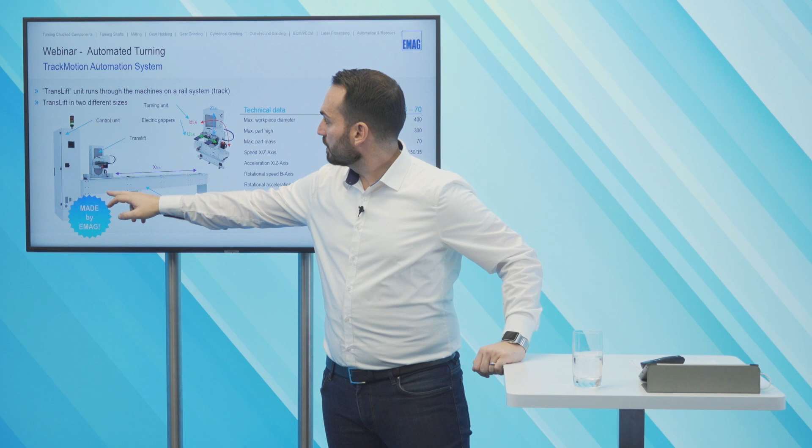Okay, so the TrackMotion automation system. I have here a picture of our TrackMotion. You can see here our translift. And our translift is running on a rail system, so we call it tracks. On the left side, you see the control unit of the TrackMotion system.

Here, a bigger picture of the translift so we know it a little bit better. We have here a Z5 axis - this is the axis to drive up and down. And we have here our turning unit, we call it B5 axis. And also the electric grippers for clamp and unclamp the parts, that's the U5 axis. On the right side, you can see the technical data.

I don't want to explain each point, only the important points. We have two different sizes for our translift: the TM 4-20 and the TM 8-70. The difference in what we can do with these two translifts is the max workpiece diameter from 200 to 400 millimeters, the max part height from 200 to 300 millimeters, and the max part mass from 20 kilogram to 70 kilogram.

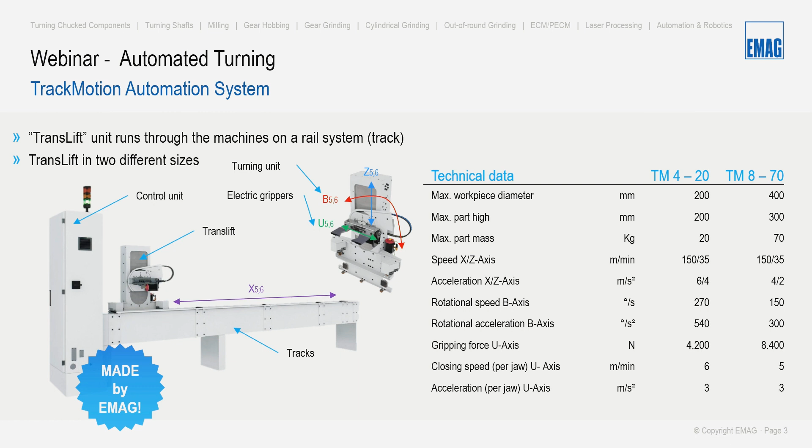Here, a live picture of our translift. So you can see here directly, the translift is equipped with a Z-axis that's lifting up to 650 millimeters. And the gripper can turn over the parts from 0 to 180 degrees. For example, you can make a turnover also to 90 degrees. We have two available gripper sizes with two sets of jaws for the maximum workpiece diameters of our VL series.

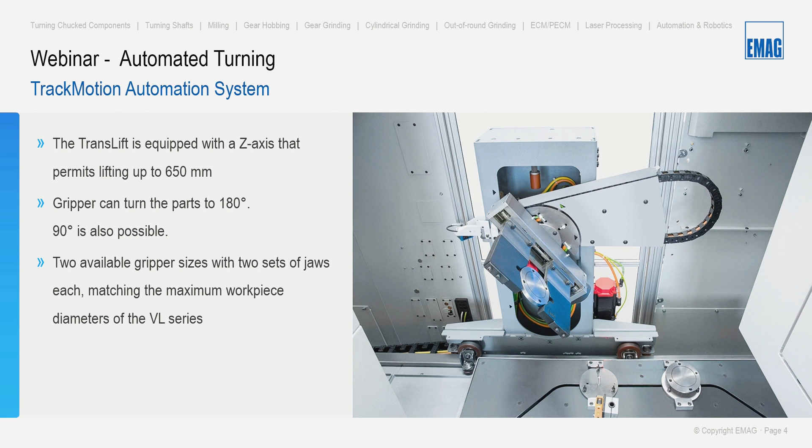If you need any other jaws, for example for your part, we can design it and can deliver it with the TrackMotion system. Here another picture of our TrackMotion system. You can see in one system we have conveyor belts, pick and place units and turnovers in one single system. Here in this example you see a stacker conveyor.

That means we can load a lot of parts. In this example we have around about 200 parts for loading. So that's very good for the footprint.

The TrackMotion is equipped with its own control unit that communicates only via an interface with the machines. So the TrackMotion has its own control unit and the machine has its own control unit, and we connect them together with the interface. The TrackMotion also controls the in-feeding and out-feeding conveyors, or in this example, the stackers.

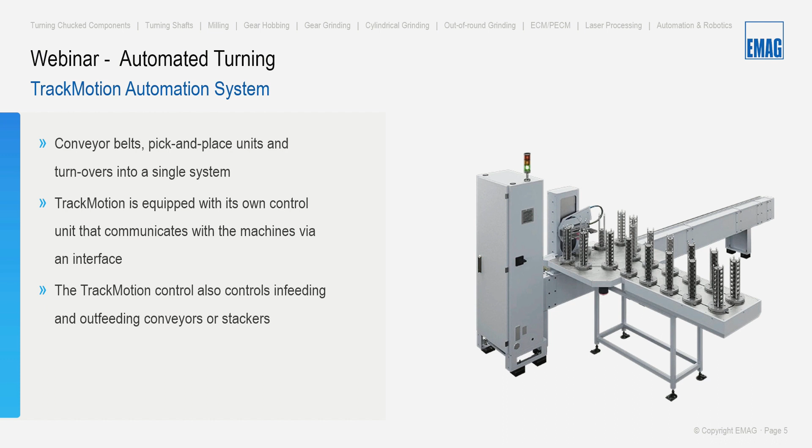So here another example of a line, of a TrackMotion line. We have here 3 VL8 machines. The first one is operation 10, the second one operation 20, and the last one operation 30. As you can see, it's a very lean assembly line, so we have a very small footprint. And also a very big advantage is that we can interlink a lot of machines - here in this case 3 machines together - very easily with our TrackMotion system.

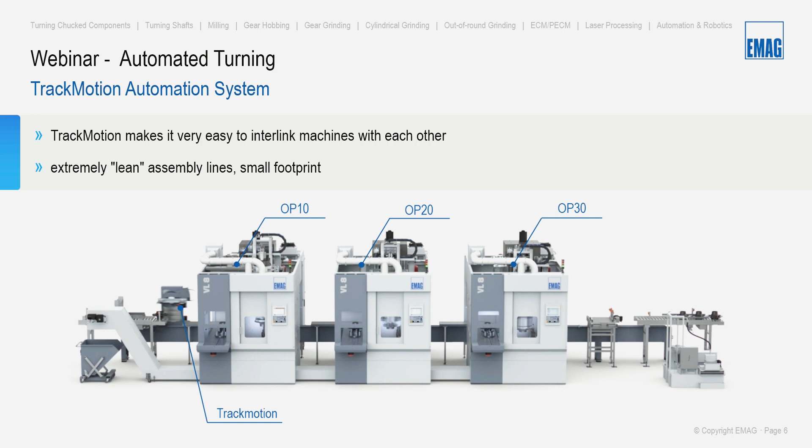Here we have now a question: How is the TrackMotion programmed? Does the automation have its own control system, or does it run via the machine control system?

That is what I have explained before. So yes, the TrackMotion has its own control unit and its own program. That means it's completely disconnected from the machine. You can make the program on the TrackMotion, and we are connected with the machine only via an interface. That means it's running by itself without any other control unit from the machine.

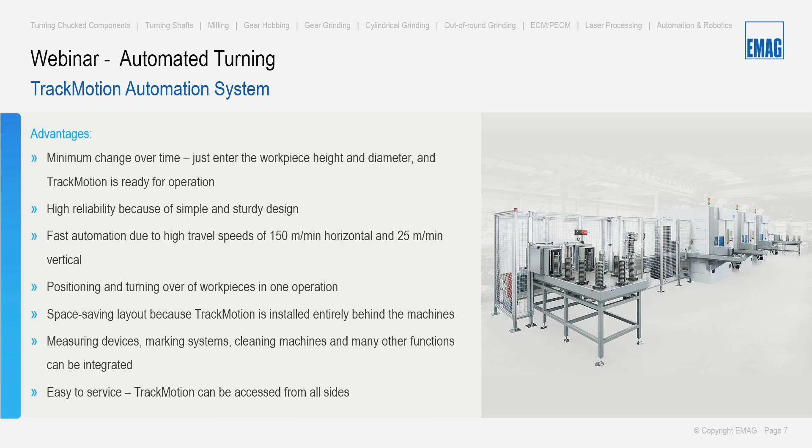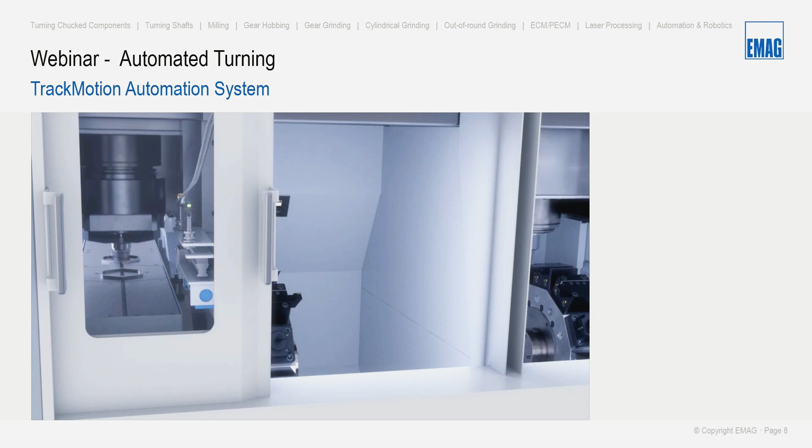Here a video of a VL3 Duo. On the left side is operation 10, and on the right side you can see operation 20. Here we load with our picker system the part in the machine area. Here we are machining the part. That's a turning process.

Operation 10: after that we check this part with the measuring probe of the machine, unload on the pickup system, and load the new raw part. The semi-finished part goes outside.

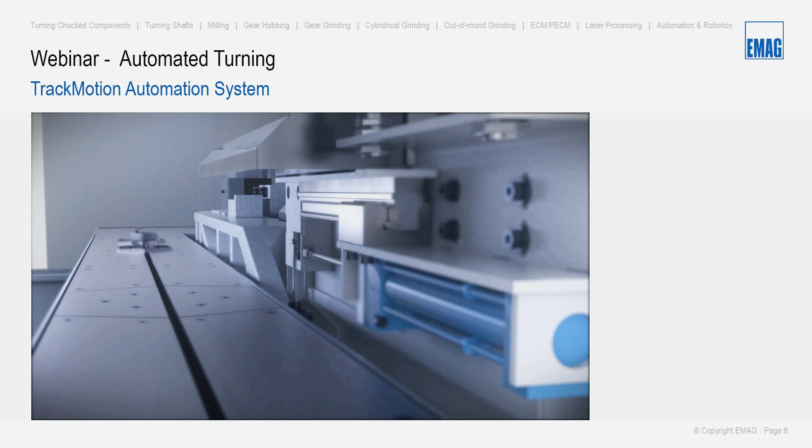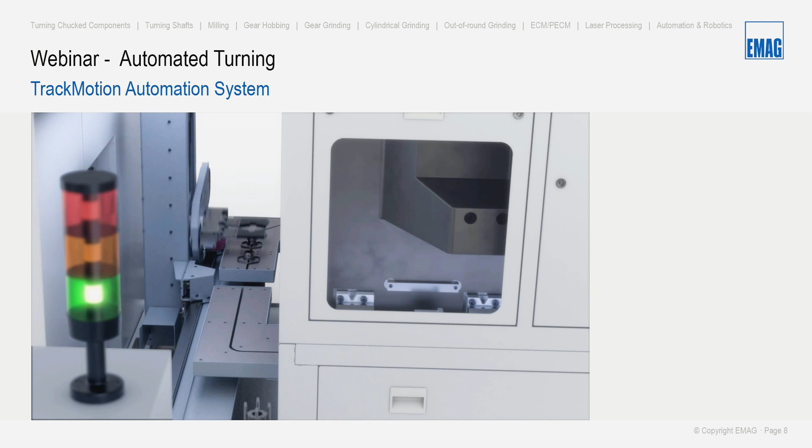The TrackMotion is ready for loading a raw part for operation 10. It takes the semi-finished part, makes the turnover to the next operation, takes the finished part, makes the turnover back, and unloads it onto the stacker system. Then it takes the next raw part directly.

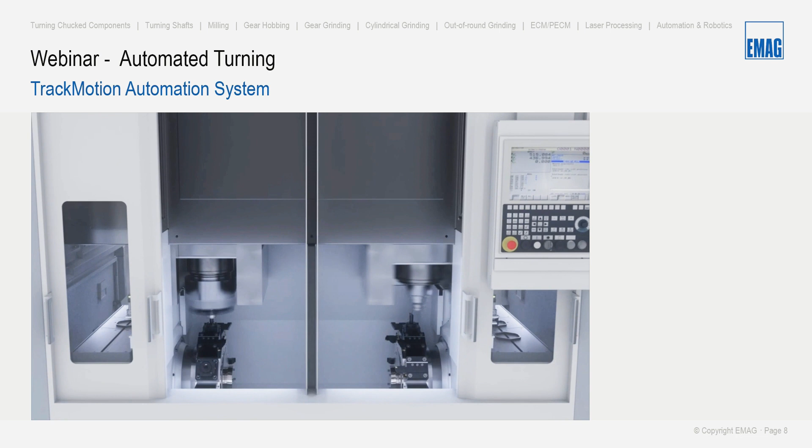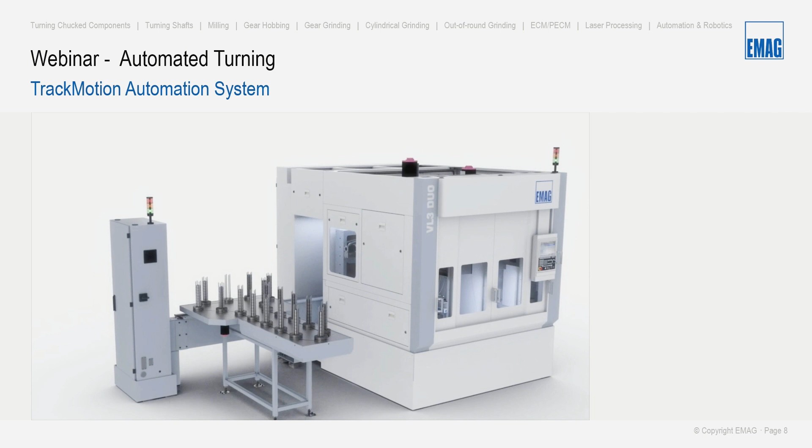So here you can see operation 20, we unload the part, take the new part for machining, and the finished part goes outside to the TrackMotion for loading and unloading. This is a very good example of a small footprint together with our TrackMotion system and our VL3 Duo with 2 operations. The TrackMotion system does the turnover, the loading, and unloading with the stacker. So it's a very good solution from EMAG.

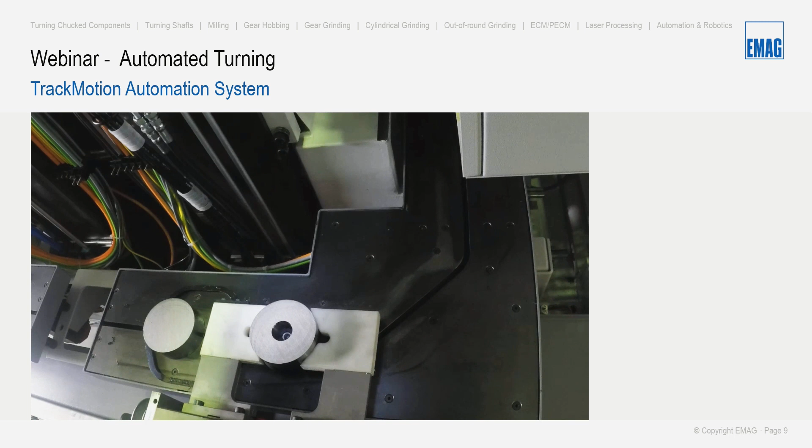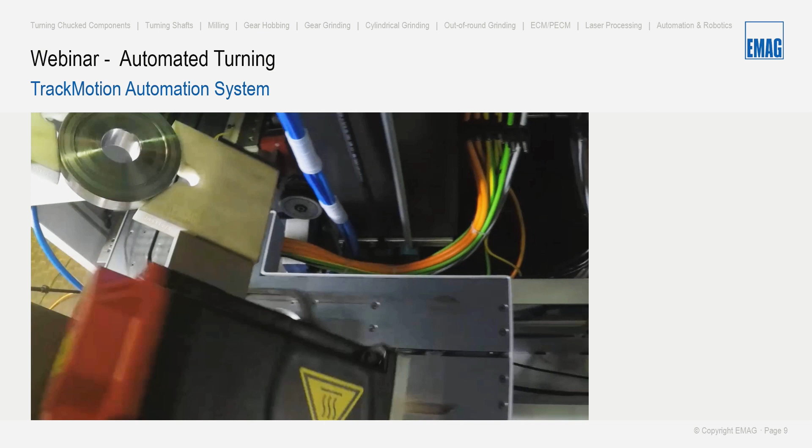Here again a video with our TrackMotion system. That's the same example as before, a VL3 Duo. Now we have a GoPro on our translift. We load the raw part, make the turnover with the semi-finished part for the next operation, and then we take the finished part, make the turnover back, and unload it on our stacker system.

So you can see here on the right side, only finished parts, and on the left side, we have the raw parts. So we have this separated.

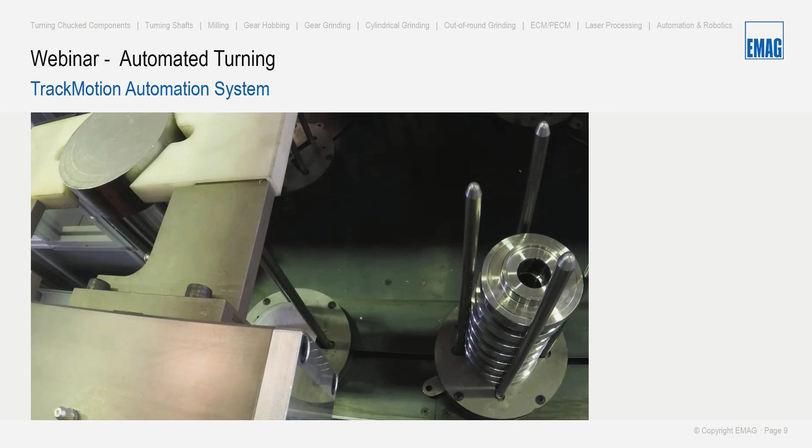Okay, we have a new question. What happens if the TrackMotion fails? Can production continue independently of the automation? Yes, that's a good question.

For example, we have 4 machines, 4 VL8s, and 2 of them are operation 10 and the other 2 are operation 20. If, for example, one operation 10 machine has a failure and we can't run it, we can produce with the other one, and the TrackMotion will load only the second machine. So this machine can be put completely outside of the line. The TrackMotion is not loading it anymore, and the line can run again.

Yes, that's possible. Okay.

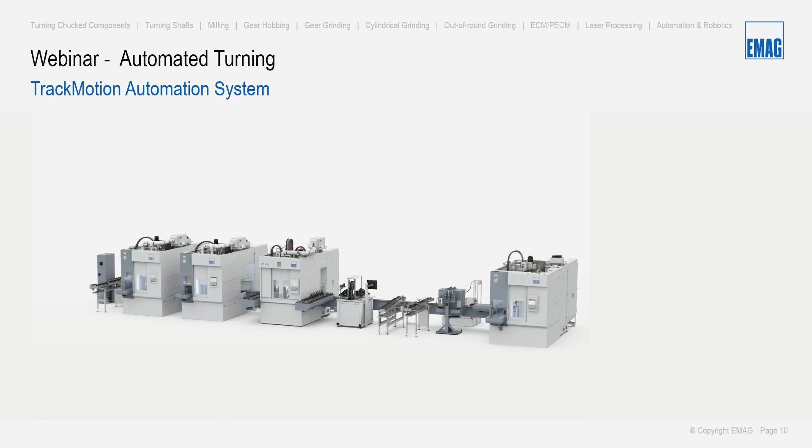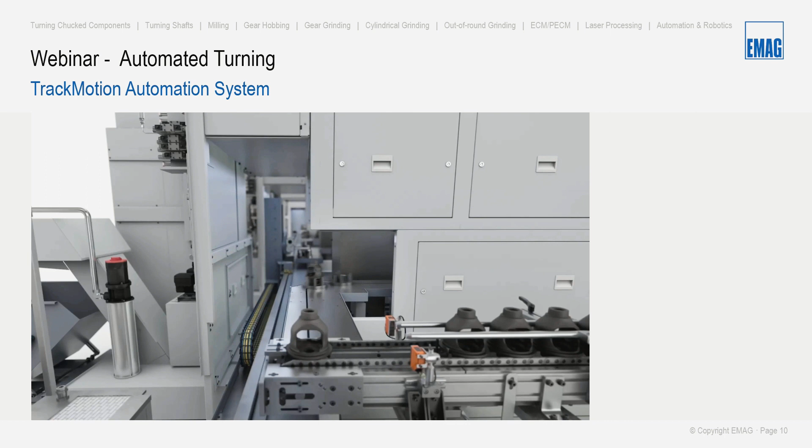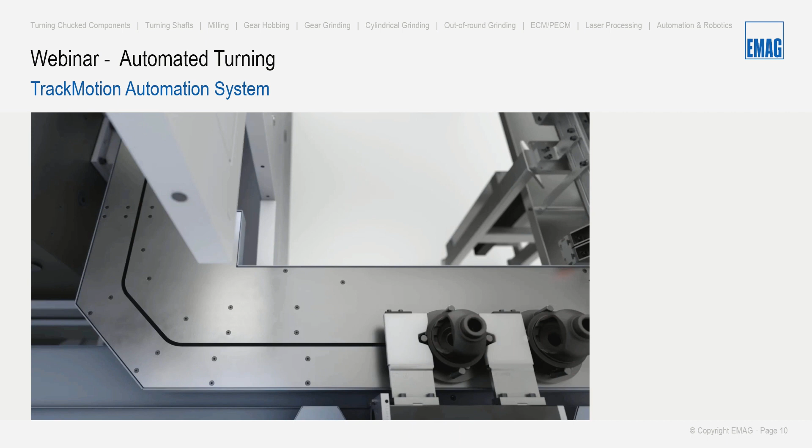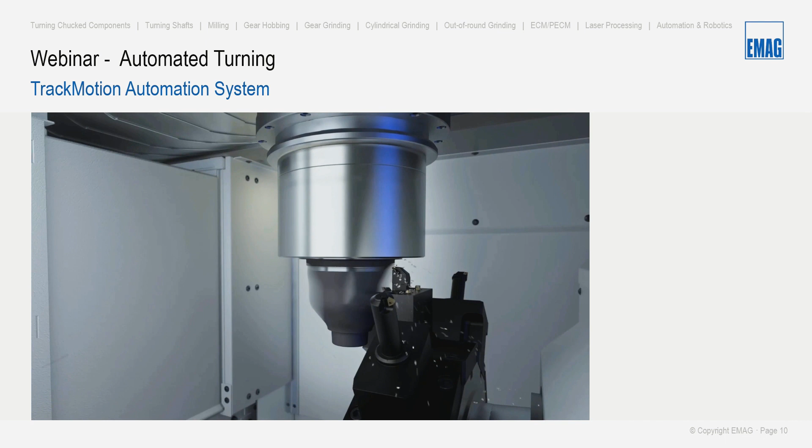Here, a bigger line with our TrackMotion system. You can see here in this example, it's a diff case. So we have here a raw part conveyor. The TrackMotion is loading the raw part for the first operation. We're machining it in the first operation. After that, the TrackMotion is again ready with the raw part, takes the semi-finished part and loads the next operation. So here we make the machining of the other side of the diff case. Then the TrackMotion takes it and unloads on the next machine. In this example, we have a VT4, so it doesn't matter which machine type, the TrackMotion can load and unload.

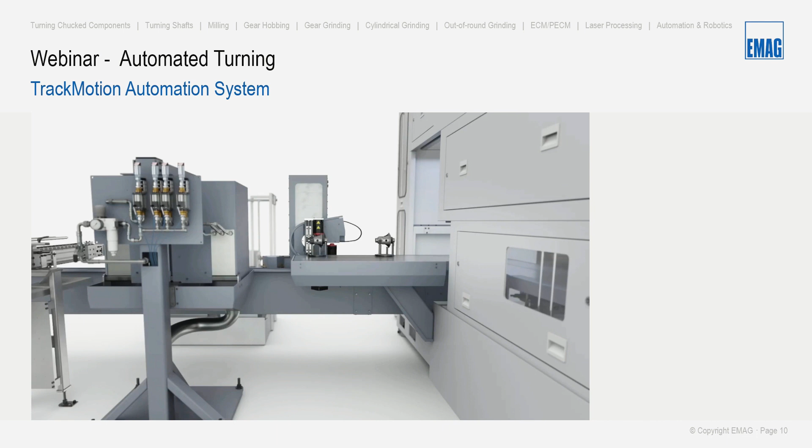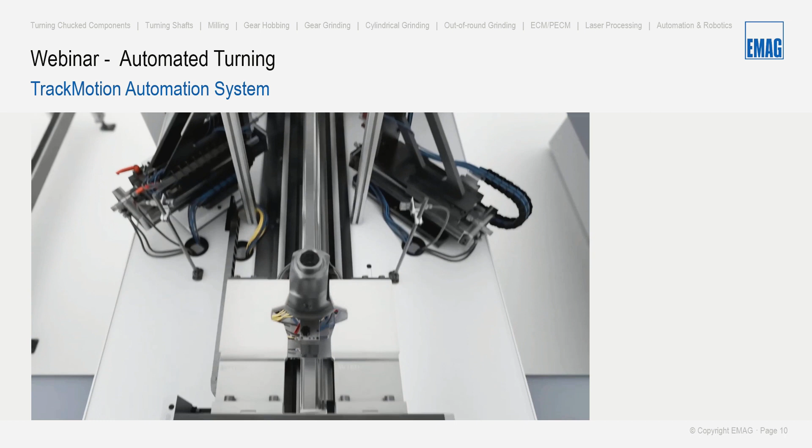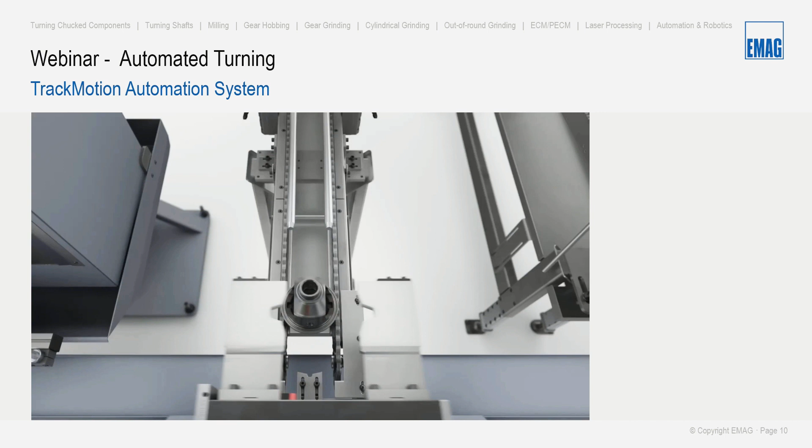So that's a very good and easy solution. You can see we can interlink a lot of machines together. Here we make the turnover to 90 degrees, not to 180, because we need for the diff case the 90 degrees to machine the ball inside. Here you can see the measuring system, so the TrackMotion makes the loading and unloading of the measuring system. And after that, it takes the finished part and unloads it on the finished part conveyor.

Good, so this was the first point, TrackMotion automation system. Now the next point is gantry automation solutions from EMAG.

We have a range of accessories and extensions for the 2 gantry loaders, from pneumatic or electric grippers to a second carriage if it's needed. For example, you need 2 carriages for 2 different parts, then it's also possible, or to save cycle time and we need the second carriage, it's also possible to implement in this solution. A rotary and swivel unit is also possible, and the gantry itself moves via a rack and pinion system, which not only guarantees high positioning and repeat accuracy, but is also very robust.

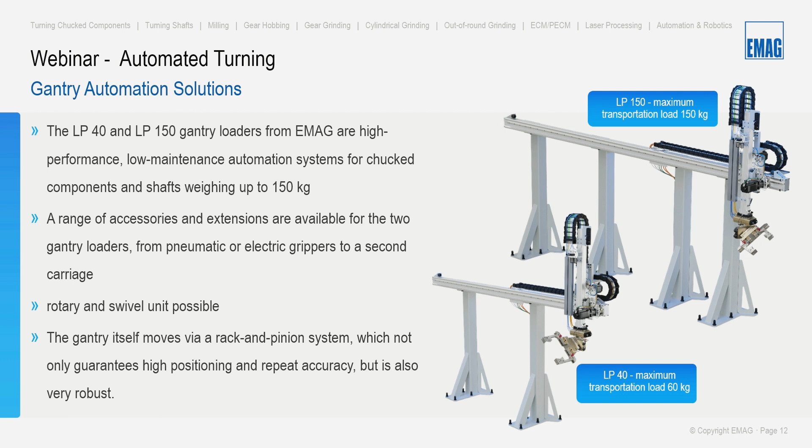Here's an example. You can see here we have 2 VSC 400 duos. On the left side we have 1 VSC 400 duo, and also on the right side a VSC 400 duo. This is a brake disc line. On the left side is operation 10, then operation 20, operation 30, and operation 40. Our gantries are here and here.

So our gantry performs several functions in this example. Our gantry is doing the turnover between the operations, so that means, for example, between OP10 and 20, we need the turnover, and the gantry is doing this job. Also what is possible is that the gantry outsources and insources SPC parts. So it outsources the SPC part, the worker checks the part, and if everything is okay, he can put it back inside and the conveyor will insource the SPC part. It doesn't matter from which operation, it's possible for OP10, OP20, OP30 and OP40.

So, and also what it's doing is placing the parts after machining on the conveyor belt.

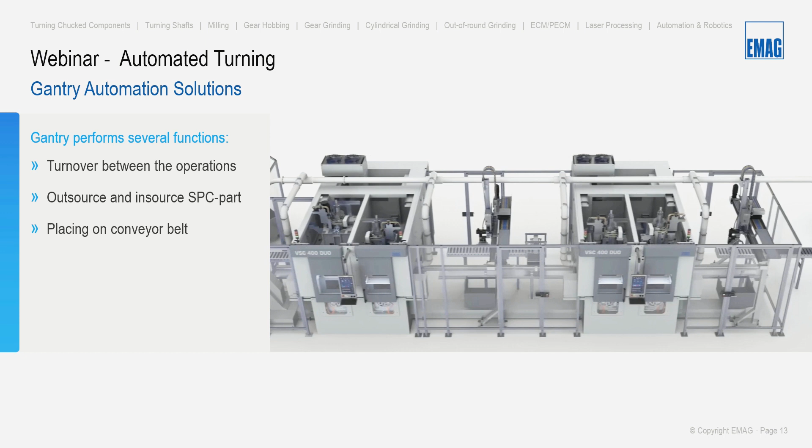We have a question now from the viewer: How are the machines set up? Are all machines stopped during setup, or can a machine be removed from the production process?

Yes, so we can put one machine outside during setup. No, so what we can do is put it outside from the line and run with the other machines. That's also possible, of course.

So here I want to show you, that's the same example, a brake disc line. You can see here our shuttle and also the buffering conveyor. So we designed the gantry inside this line so that we don't lose too much floor space. That means also a good advantage for the footprint of our gantry automation solution.

Also a big advantage of our gantries is that we don't need our own control system for the gantry. That means we put the axis on the machines, or the control for the gantry comes from the machine control, so we're saving a lot of costs.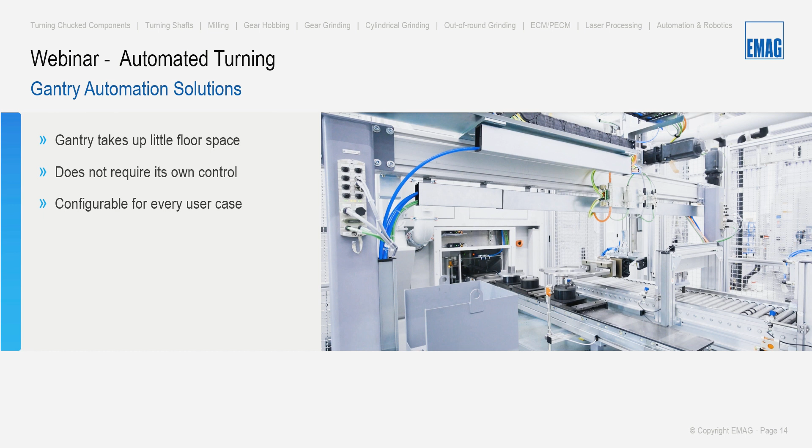Also configurable for every user case. It doesn't matter what you need. So if you need a turnover of the part or not, we can do it or implement everything in this gantry solution from EMAG.

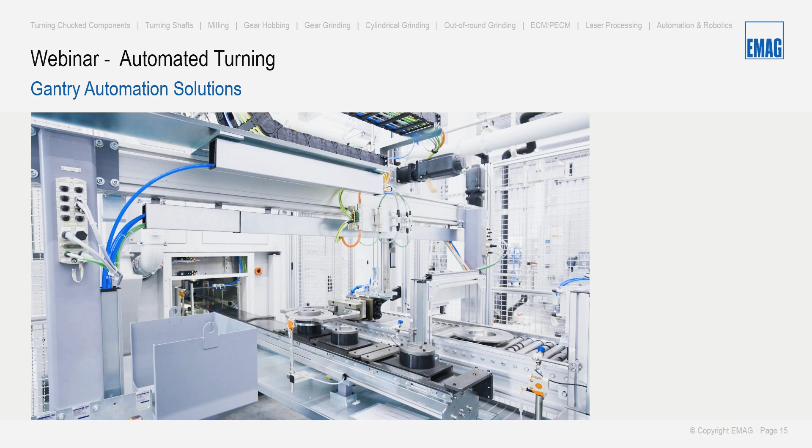Here a video. We're taking the part, clamping with our gantry, makes a turnover to put the chips out the brake disc, and after that we unload on our conveyor belt. Then the gantry is ready to make the next job, to take the semi-finished part and to make the turnover for the next operation.

So that was the first 2 points from my side. The next point, robot automation system, will present you Johannes. Thank you, Johannes. All right, please. Thank you, Daigan, for your presentation. Now I want to introduce our robot automation cells.

They are fit perfectly to our EMAG machines. They can mount on the left-hand side or also on the right-hand side of the machine. It's also very easy to retrofit an existing machine of us. Our cells consist of a base plate with robot and also with an electrical cabinet included. We have an entry door on the back side to enter the cell and do the maintenance, for example.

It's also possible to integrate an additional unit like an SPC drawer or maybe a blow-off station. We mainly work together with a KUKA robot, but also FANUC is possible for us.

We have 3 different loading situations, and here we can select the best situation for our customer requirements. I want to introduce you now in detail: we have the basket stacks, we have a drawer system, and also the infeed with the bin picking solution.

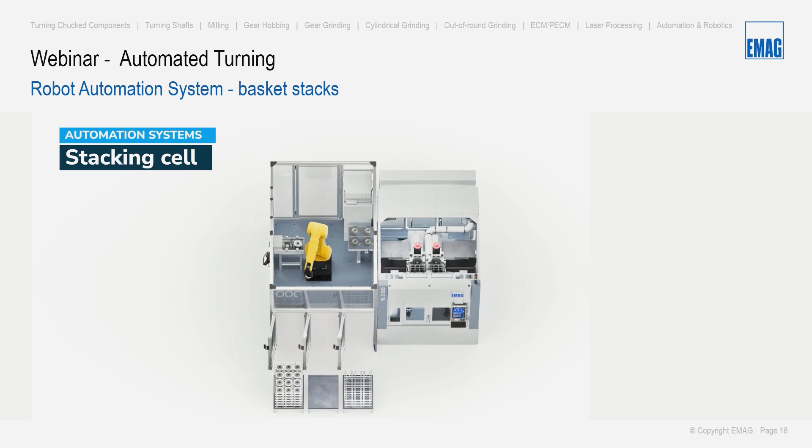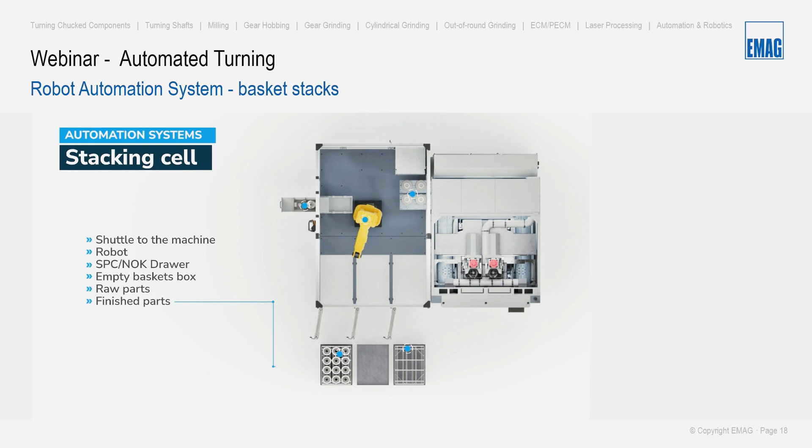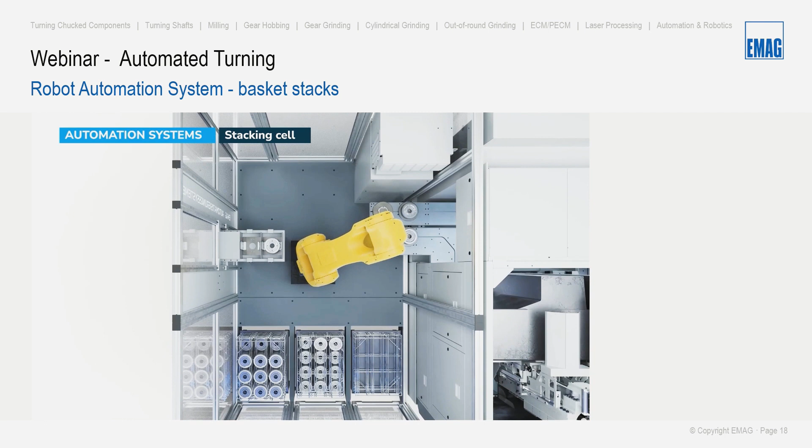Here you can see our basket infeed solution. It's possible to have up to 3 loading bays. We can include the baskets or the trolley of the customer, so we can use the already existing baskets from the customer. Here shown, the size of the baskets are 400 by 600 millimeters, and the stacking height of the baskets can be 1000 millimeters.

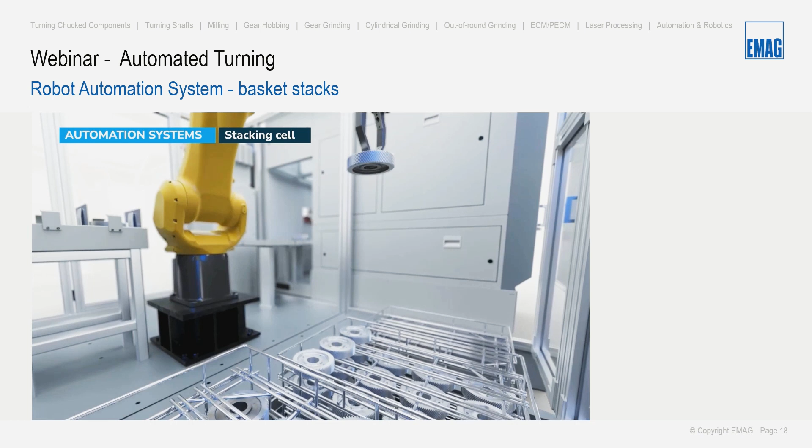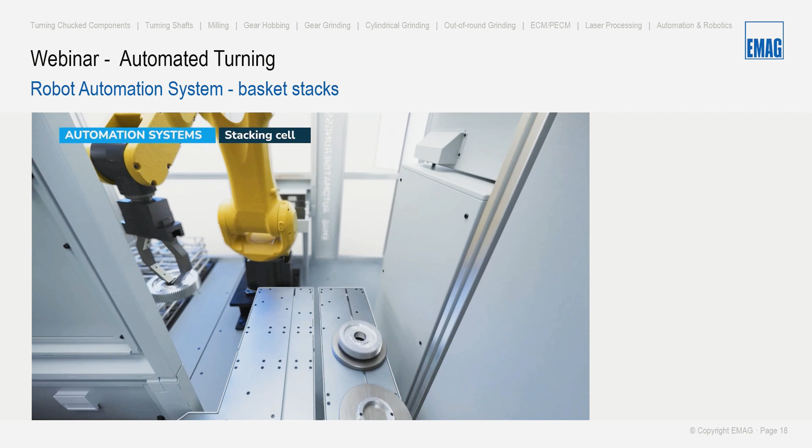The parts are oriented in the baskets, therefore we don't need a camera for the robot. Here you can see the robot will unload the raw part and feed the pallet of the OP10 of this VL3 duo machine. And also the robot will turn over the part to the OP20 pallet, and after that, the finished part will unload to the basket again.

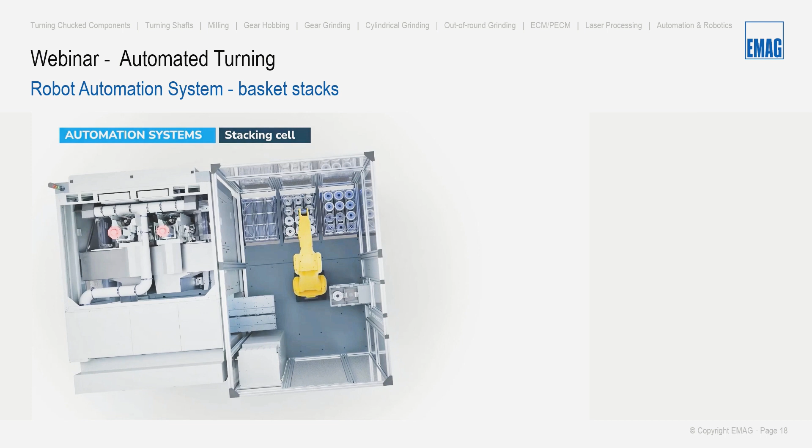The robot is also prepared to unload the empty basket to the different bay.

Johannes, we have a question now. Okay, when is which automation system used?

Okay, I think the viewer wants to know which of our 3 loading systems. I think so, yeah. So in this case, we are talking directly to our customer, and we are choosing together the best solution. For example, this stacking cell solution - if the customer already has some baskets inside his plant, then I think it's a good solution to integrate his baskets and trolleys. But we always have to discuss it directly with the customer and decide together. Okay, thank you. You're welcome.

Okay, now I will continue. Here you can see our drawer system. We have 2 big bays in the front. Each bay can have up to 4 drawers, but that amount depends on the part height.

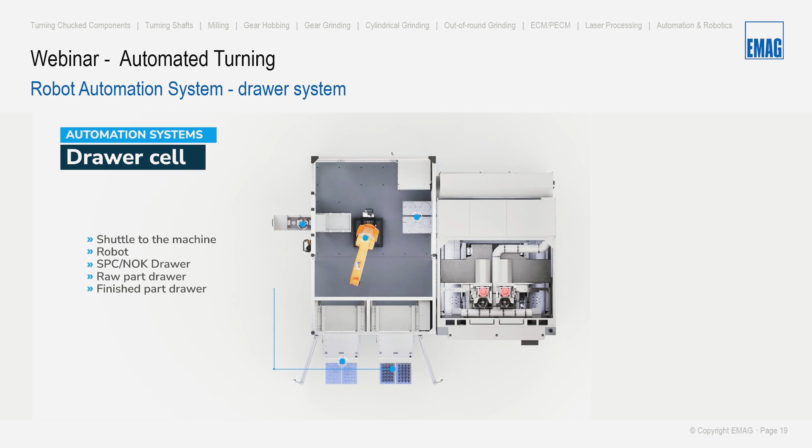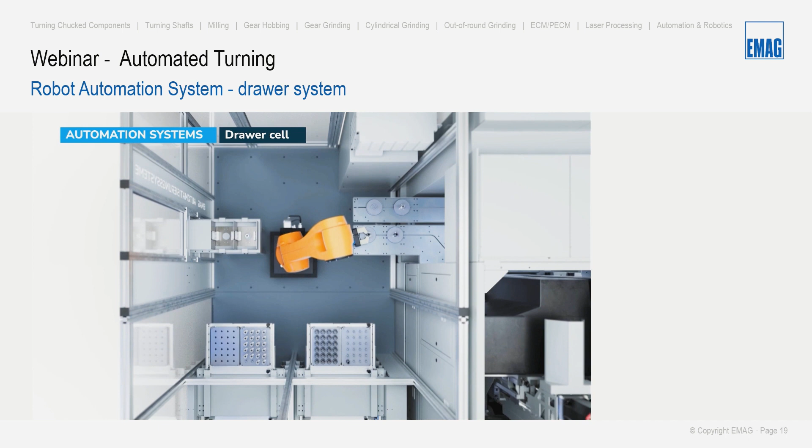Each drawer can have 2 workpiece carriers, and the worker can load these workpiece carriers directly or externally, and load a completely loaded workpiece carrier to the drawer. The robot continues its work inside because they are completely in different areas. So we have a closing door.

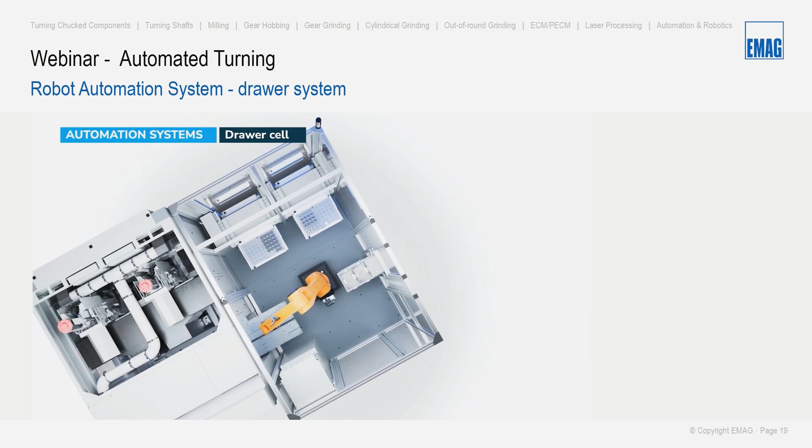As you can see, also the robot will unload the raw part out of the pallet and load it to the machine. The robot turns over the workpiece to the OP20 and unloads the finished part directly to the workpiece carrier on the drawer. In the backside, you can see an SPC drawer - here it's possible to outfeed the SPC parts and also to feed them back into the system.

Now I'm showing you our bin picking solution. Here we have 2 big bays in the front. On the right hand side you can see the bulk material container. The size could be maximum 800 by 1200 millimeters.

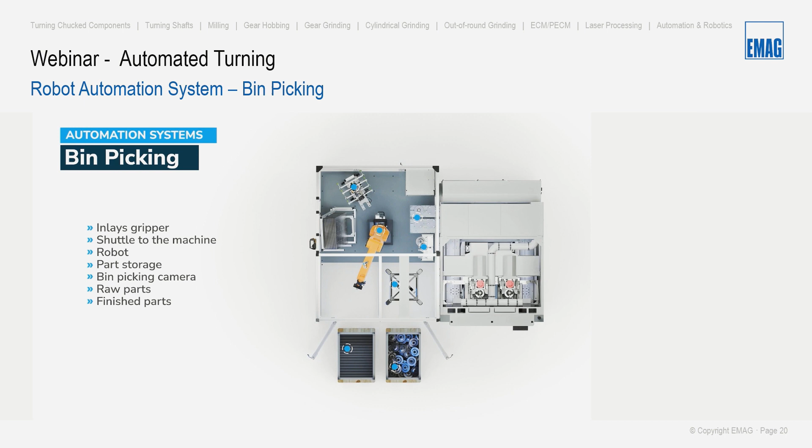Above that container we have a 3D camera. That camera recognizes the parts and also the orientation of the part. Then it's possible for the robot to grip the part out of that container and load the machine.

In this example, we also have a VL3 duo machine. So the robot will load the raw part, turn over the part to the OP20, and then unload the finished part directly to the second box.

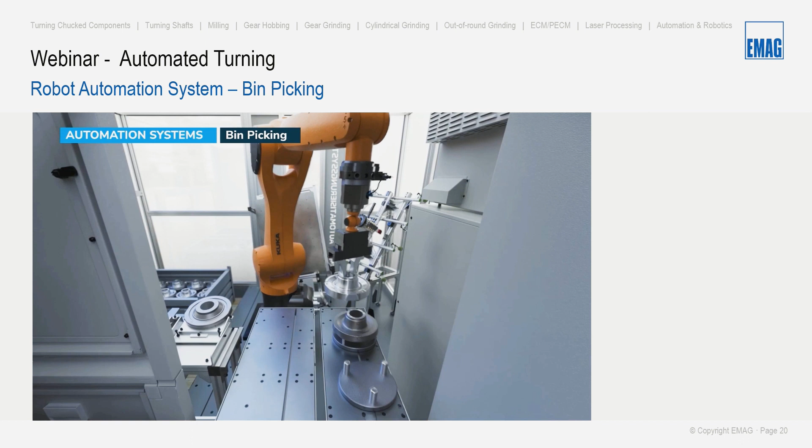Now here you can see the first layer of parts is full. So now the robot can automatically change the gripper and put a layer inside the box. And then the robot can unload the next finished parts again to the box.

Okay Johannes, we have the next question. How flexible is bin picking when changing workpieces? Does the camera system have to be retrained? Okay, that's a very good and interesting question. Thank you.

So if a part is already trained to the system, or maybe two parts, then you can just select the different program inside the control. If the customer brings in a very new part to the system, then of course you have to train this new part to the system. And after that, you can just change the program to the different part. So a new part, one time, you need to retrain, and then after that, you don't need to do that for this part anymore. Yes. Okay, good. Thank you. You're welcome.

Okay, now I'm showing you our stacking cells of the SES series. They are also fit perfectly to our VL and VT series, and also to our hobbing machine of the K series. It's also possible to retrofit existing machines and automate them.

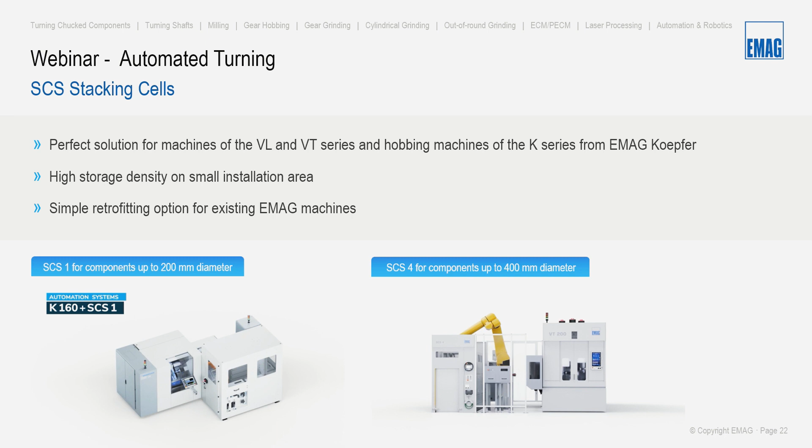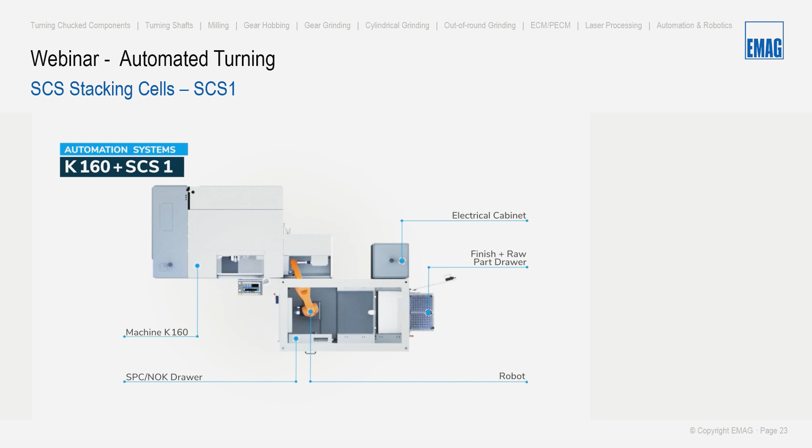Here you can see an SCS1 cell mounted to a K160 hobbing machine. We have a loading door in the front, and again our drawer system included. Also, we have the opportunity to load 4 drawers inside, and each drawer can handle 2 workpiece carriers.

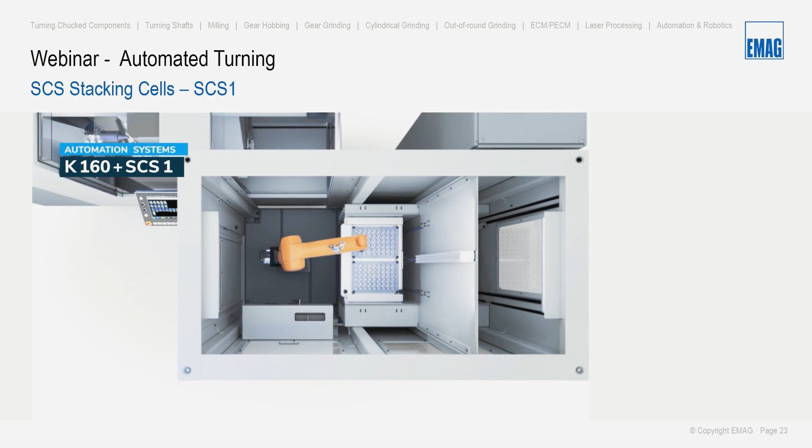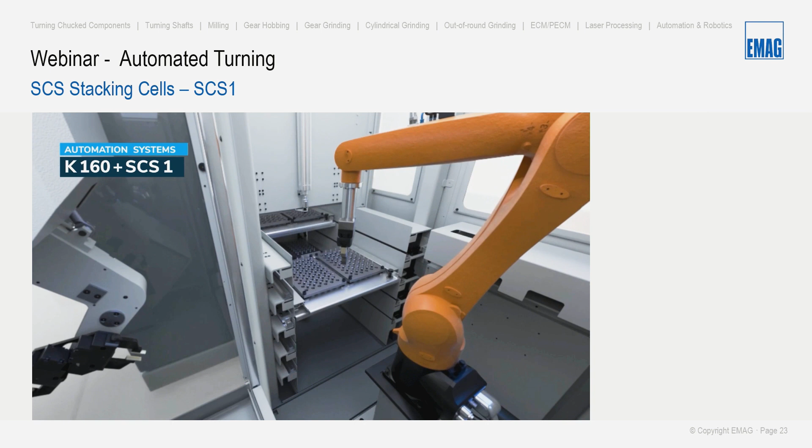In the middle, you can see a door. This door will separate completely the worker and the robot. The robot will unload directly out of an internal loading gantry of the machine and loads the parts to the workpiece carrier. And if a workpiece carrier is full, the robot can automatically change to the next drawer.

You can see the SCS1 is a very small and compact automation solution with robot already included. We have a housing, and also the electrical cabinet is included. In the front and in the back side, we have a door, so you can enter the cell to maintain the robot.

Johannes, we have the next question. Do you have experience with unmanned production? Can the machine produce an entire shift fully automatically? How do you deal with faults during production? Automatic notification. Okay, that's also a very good question.

Yes, we have experience with unmanned production. Here it always depends on the system. So it depends how high is the amount of the actual raw parts available, if it reaches a whole shift. And also it depends on the tooling of the machine. So maybe we have to change the tool after its tool life. But also we have solutions like sister tools inside the machine. So we are delivering solutions for that.

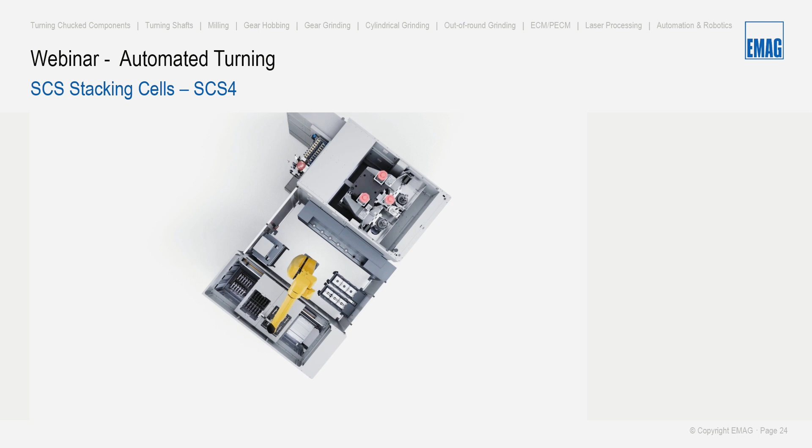Okay, now you can see our SCS4 cell. Here we also have a very big opening door in the front. Here the worker can feed in a stack of pallets or baskets with a forklift, or maybe like here shown in the video, it's also possible to load via AGVs.

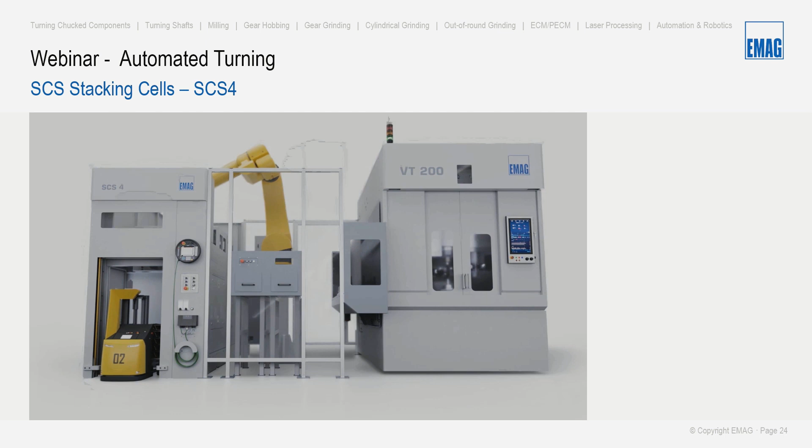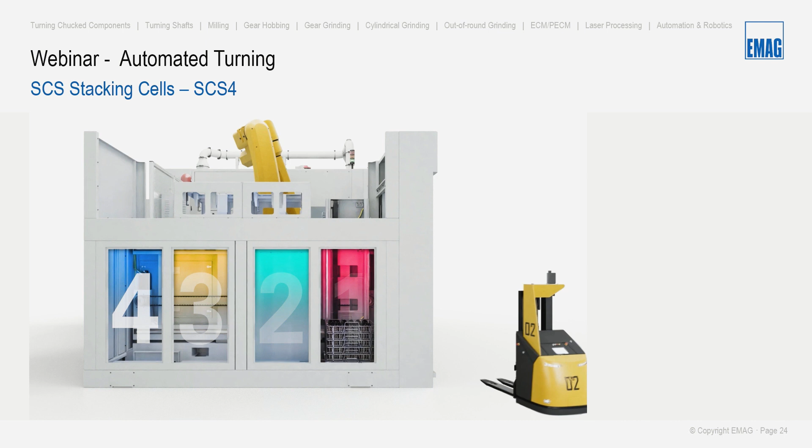The SCS4 has an internal loading gantry, and that gantry will sort the baskets to its different areas. So we have an area for the raw parts, and we have an area for the finished part baskets. And also we have our transfer areas in the top of the machine. Here we can integrate an external automation, like a robot or also a gantry is possible.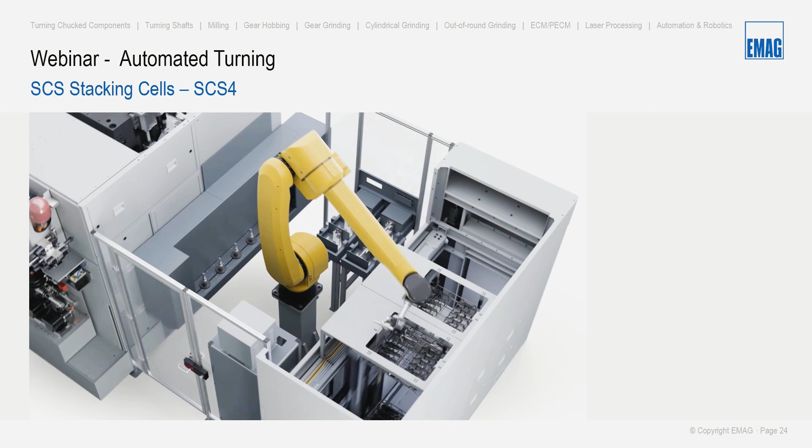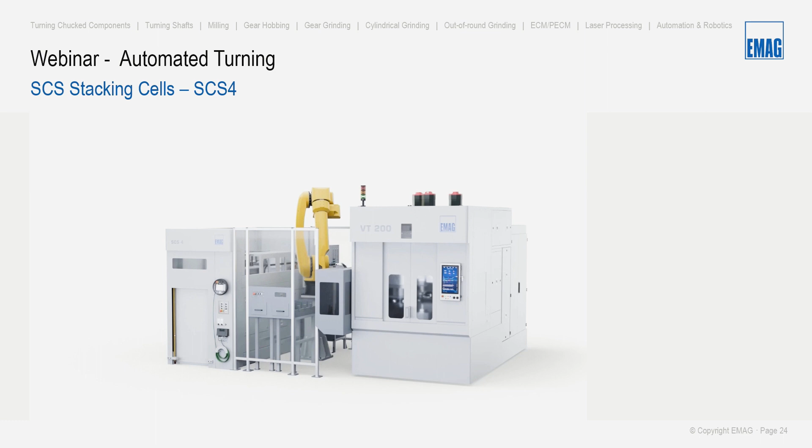The robot will unload the raw part out of the baskets of the machine and directly load a machine, like here shown a VT200. And after that, the robot will unload the finished part back to the finished part basket of the SCS4. And the worker then can take the whole stack of the baskets out of the machine.

Okay, now I will present our customized automation solution. Here we are preparing solutions for special customer requirements. We can interlink a lot of our EMAG machines out of our portfolio, but it's also possible to integrate third-party machines if they are needed for the process of the part. Our task is to choose the best automation solution for the machine to handle the parts.

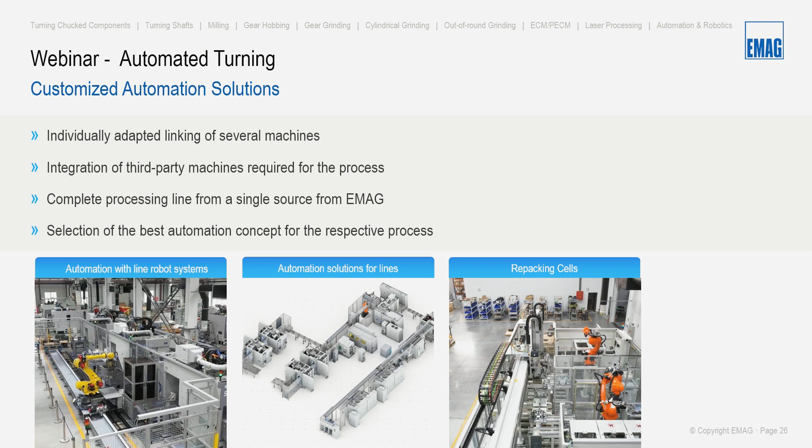And here I brought to you 3 proposals, which we already designed together with our customers. These 3 solutions I want to present now. The first one is a line of 3 VL8 machines in a line. 2 machines are producing the OP10 and 1 machine is producing the OP20.

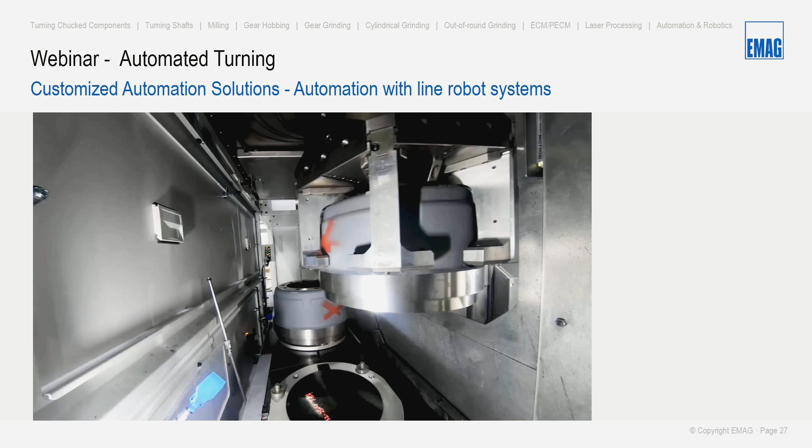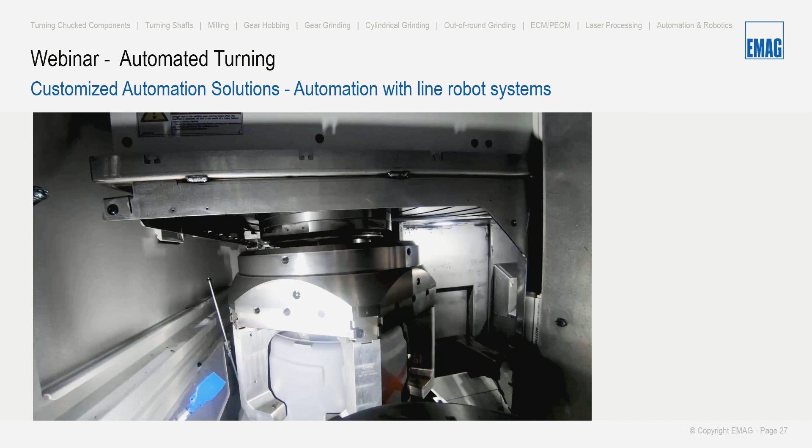A robot will load the part to the L shuttle of the machine. The machine will unload the semi-finished part to the conveyor and grip the new raw part. After that, the machine will load its production area and produce the part. The finished part of the OP10 will go outside to the robot, which will turn over the part for the OP20. Here you can see the OP20 machine is very far away from the OP10.

Therefore, we have to mount the robot on a 7th axis to reach the OP20 machine. Again, the robot will load to the L shuttle of the machine. The machine will unload the finished part to the L shuttle and load the OP10 part to the working area.

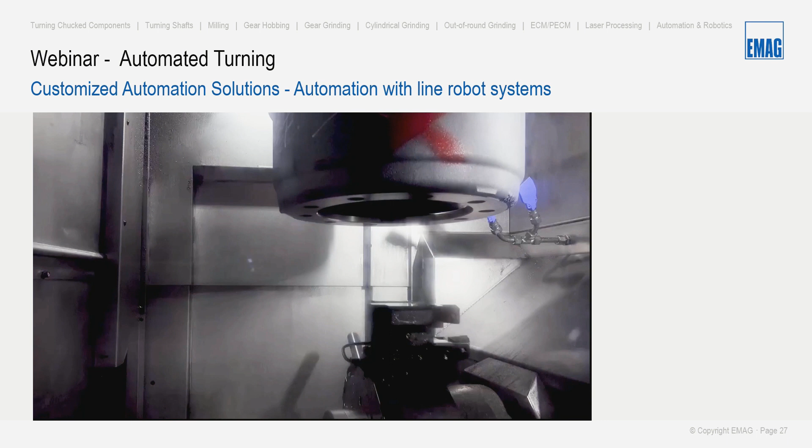Now you again can see a short sequence of our process for the part. After machining the part, it goes outside to the robot area. Here the robot again turns over the part, loads it to a blow-off station and also to a marking unit. After that process, the robot will load the finished part to a finished part pallet.

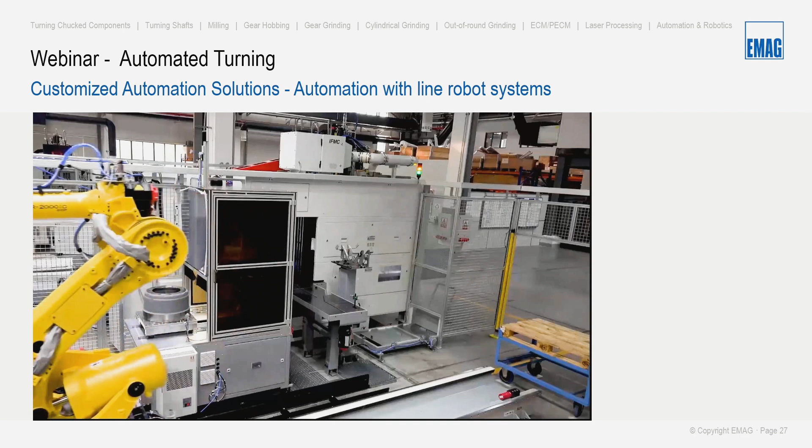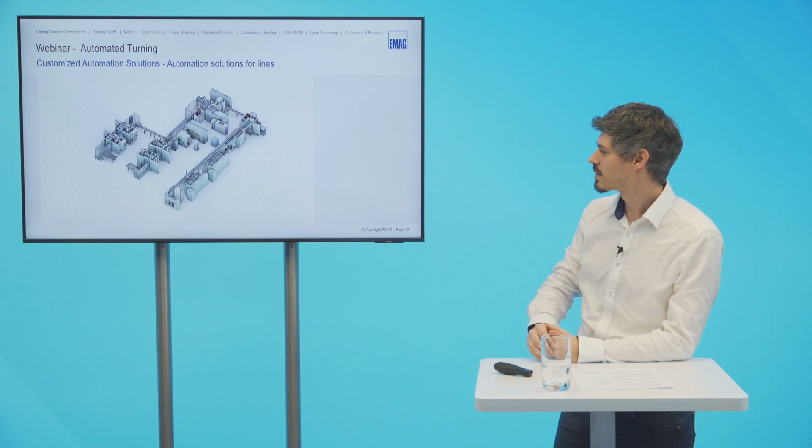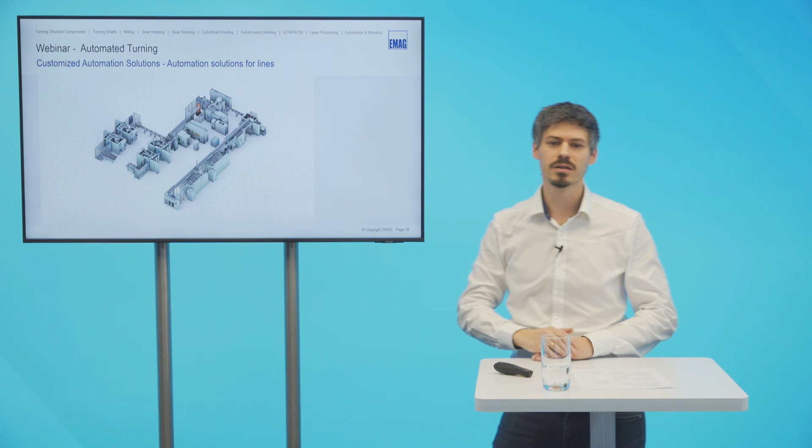Also on the backside we have a TurnMotion, which will turn over the part for the production. Here we have a connection conveyor. From this conveyor, the gantry loader will grip the part, load a blower station and also a measuring unit. Then the part goes inside a robot cell.

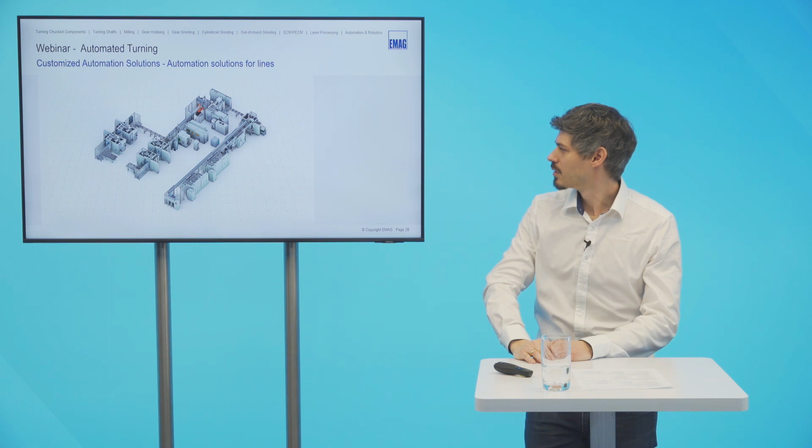This robot will load a hobbing machine. After that process, we have a pallet conveyor belt in the back. Here we have a very long gantry loader, which will load several different turning machines of ours. At the end of the line it will unload the completely finished part to the basket of an SCS4 cell. The worker can then outfeed all finished parts in the basket in a stack.

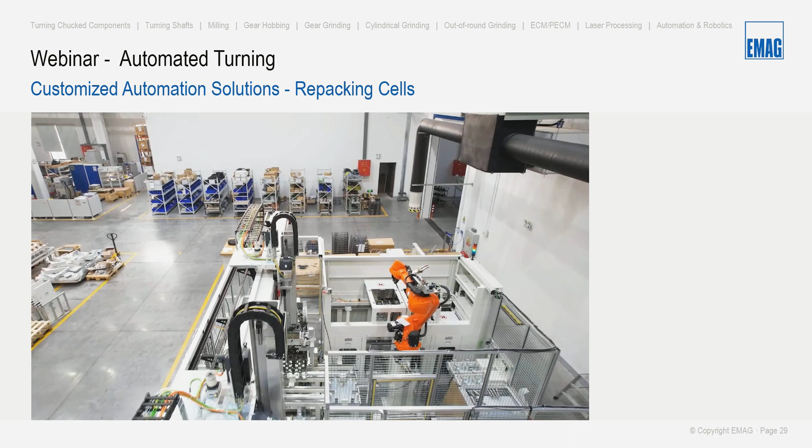Here you can see a pure repacking cell. We have 2 SCS4 machines. Each machine has a robot integrated. The robot will unload the baskets of the customer and load the parts to a hardening basket.

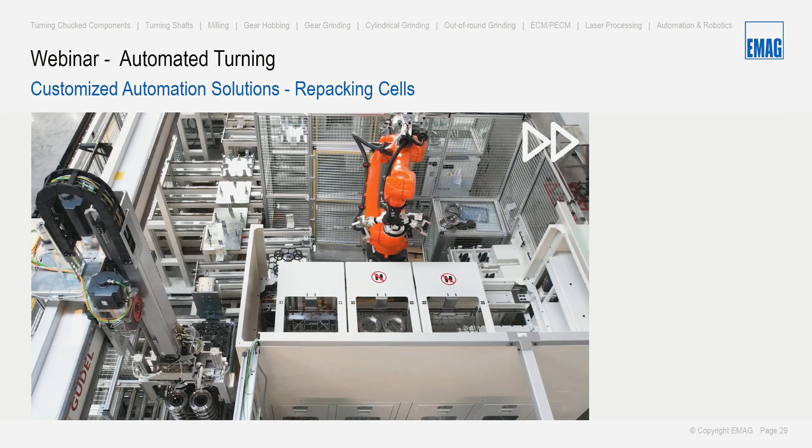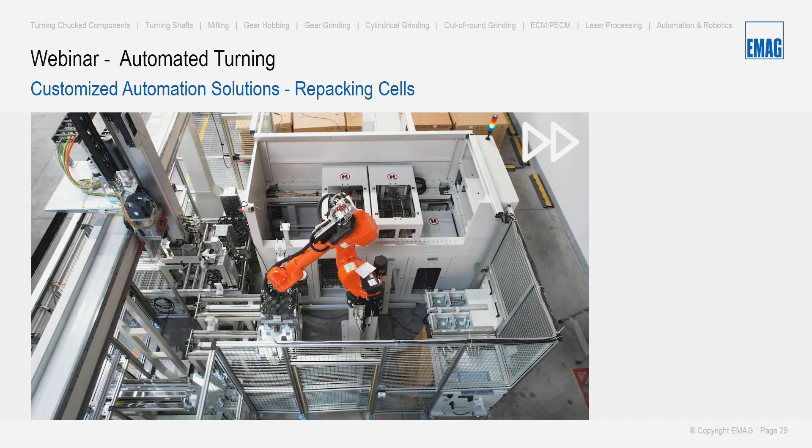A gantry loader between these 2 machines will handle the loaded hardening baskets and transfer them to a hardening machine or unit. After the hardened parts come back to the cell, the second robot will unload the hardened parts back to the baskets of the customer, again at the top of our SCS4 machine. Then the internal gantry loader will sort the finished hardened parts back to the loading door of our SCS4, and the worker can outfeed all the parts in a stack.